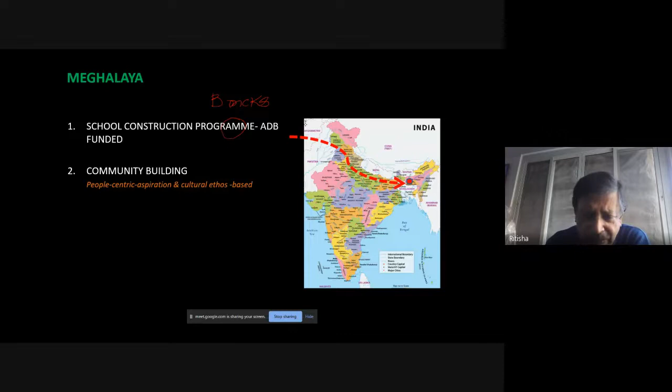So the honorable chief minister encouraged, okay, do you have any idea? I said, why don't we revive bamboo, which your people already know? Then he said, well, there may be some objections from the people because everybody is dreaming of reinforced cement concrete. You know, pan India, if you look at the course of civil engineering and architecture, almost 90 to 95% is reinforced cement concrete and steel, and then pre-stressed concrete, and then cable structure and the like.

But we do not find much coverage in the course curricula on traditional building materials, bamboo in particular. So quite often, the government engineers and generally my own engineering and architects fraternities are not always necessarily very well equipped to deal with bamboo. If I do not understand much about bamboo, how will I convince others about bamboo? So in Meghalaya, I thought it is a good opportunity, with the help of the highest body of the state, why don't we give it a try? So we began the journey.

ADB was supposed to construct 117 school buildings in Meghalaya as demonstration projects, which will be livelihood generating, which will be respecting the local culture, and in particular, it should be climate change friendly. So out of 117 schools, when we did the resource mapping, we found that in the Garo Hills, we were supposed to make 54 buildings, out of which for 9, the community decided, okay, we go for treated bamboo.

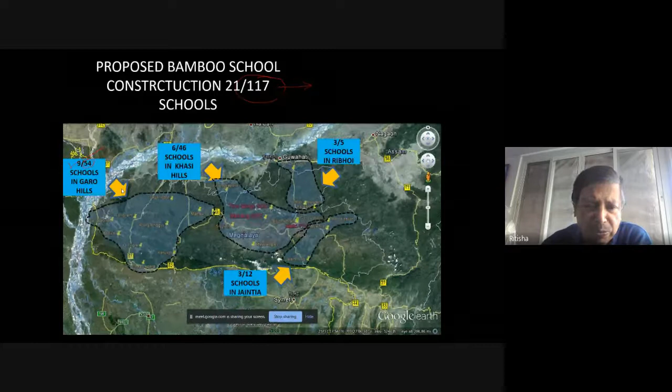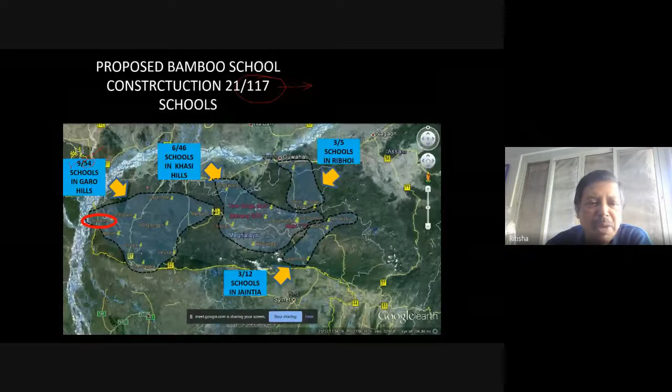In a similar manner, in Khasi Hills, out of 46, 6 school buildings were supposed to be built with bamboo. Likewise, in Jaintia, in Ri-Bhoi. These are the buildings. So total 21 buildings were supposed to be constructed using bamboo. We were all very much enthusiastic about it. And this is Garobadha, one particular block of Meghalaya, where people en masse came forward and said, okay, we will go for a bamboo school building.

Now, I started doing resource mapping, and I got this gentleman who was 84 years old at that particular point of time. And to my surprise, he was in Shillong. To my surprise, he built 30 buildings which were more than 80 years old in Shillong proper, using different varieties of bamboo. But you won't see them because they were all plastered. So this is one sample which he brought for me. And seeing this one, I was so excited.

Then I started traveling to all the schools that he had designed and constructed. And this man didn't have any formal education, but he could read, write, he could do calculations, and he could do the estimations and everything. So we decided that we will make this gentleman as a key man.

Meanwhile, I had already these 4 young boys and girls who were working with me. They were all local architects. And these are the 4 school teachers in Garobadha who said, we would like to help you directly and by getting involved in the whole project. Fantastic.

Did it really happen? It didn't take off as planned. Why? The consultant was pro reinforced cement concrete. That's basically the main problem. Who was this consultant? Because 100 million US dollar was the investment. So we needed a consultant. So the consultant was appointed and they wanted to use RCC. So it was not getting a favor from them.

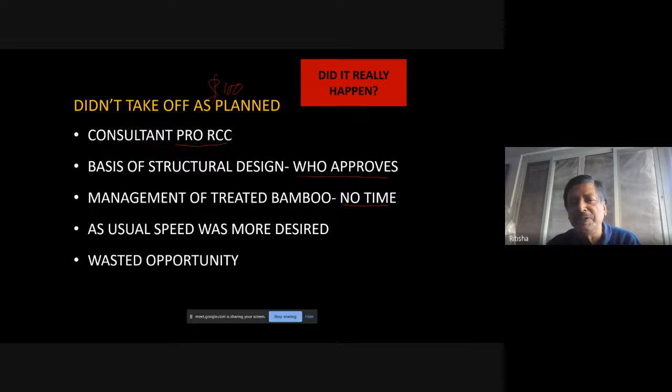So people started saying, sorry, we want more buildings. As usual, speed was more desired. Even Asian Development Bank started saying, come on, man, let me see the school buildings. This was a wasted opportunity. So in spite of such a favorable ground, where the state chief minister was giving us an excellent opportunity, we missed the bus. But Meghalaya still depends on the other states, and they are still importing materials from other states where the state itself is so rich in bamboo.

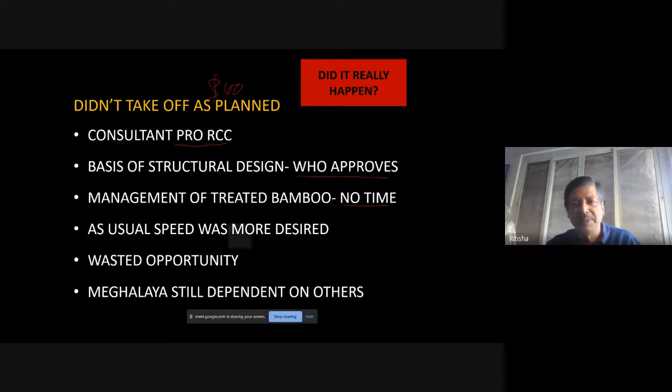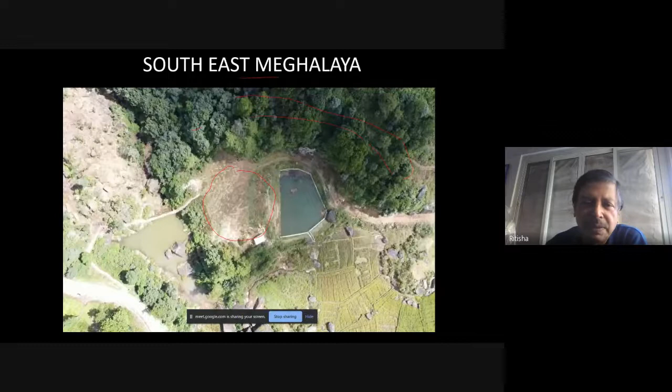But the situation is not all that bad. Currently, I'm working on a project which is in the southeast Meghalaya, and this is basically the site, and this is basically my area. And in this entire forest, there are bamboos tucked in everywhere. Now, in the village, already people have started using bamboo. This is one bamboo building which is 40 years old. And this bamboo, what they do is they do not go for chemical treatment.

There is noise from somewhere. Noise is coming from somewhere. Yeah, thank you very much.

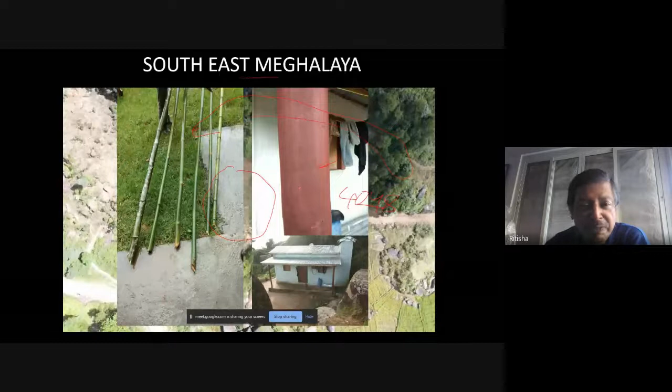Now, the local people, what they use is they simply use red oxide, mix it with a little bit of creosote oil, and simply paint it. And there are many, many buildings within the village which are all built using bamboo. We said, fantastic, we will use this as a base. So we had a community meeting, and in the community meeting, there were a couple of bamboo workers who were invited, and we planned out the entire process. And we all decided that, okay, let's go and build with bamboo.

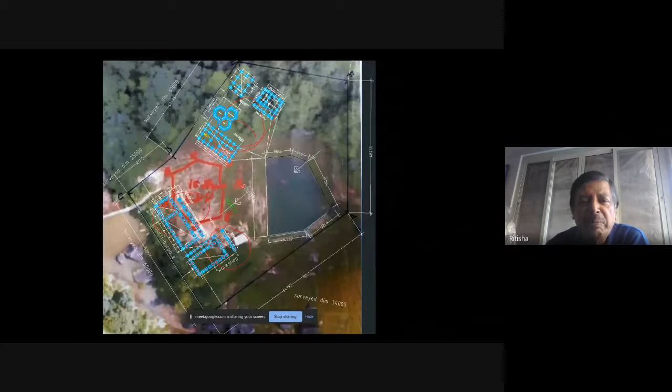Now, this is the site plan where you can see all the building locations. This is basically the training hall, and this is the workshop. These are the different bamboo production units. So the community wants to do a branding, and they wanted to manufacture different building components using bamboo so that they can supply it to different parts of Meghalaya.

So the project right now is at very, very nascent stage. The foundation work had started last week and it's going on. And I'm pretty sure in another 6-7 months' time, we should be able to do something very, very interesting. Here, I would say the villagers, they have the credit of 90% because everything is decided by them, funded by them, etc.

Sikkim. I was the rural housing advisor to the United Nations Development Program. And UNDP was approached by the Sikkim government that under Pradhan Mantri Awas Yojana, why don't you introduce bamboo? So fine, fair enough. So we decided that we will go to the participatory design approach, and following that, we'll be doing a hands-on training program of the masons and the junior engineers, and in the process of beneficiaries' house construction. So that was basically the model, and we thought that this is an excellent opportunity to promote bamboo. So we selected Jorthang, Ghezing, Pelling, and Gangtok.

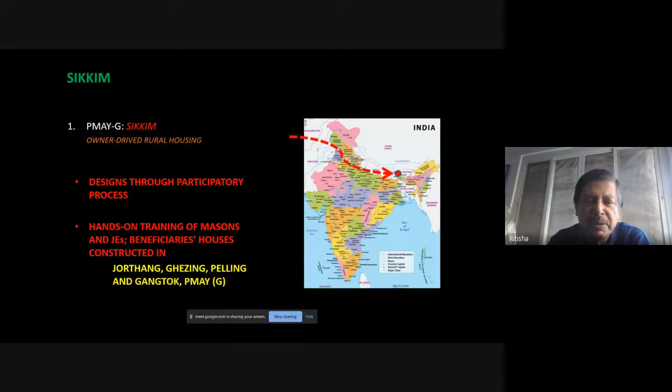These are the few places where, through a hands-on training program, we would like to actually build houses under Pradhan Mantri Awas Yojana, and we'll demonstrate how effective bamboo is. Now, when I did resource mapping in the Jorthang areas, I found that these buildings are all 40 to 50 years old. And this is mud. This is mud. But this is cement on bamboo mat, the ikra.

So, here the basic problem is you see erosion here and erosion there because the plinth height is pretty small, and because of the backsplash of the rain. Backsplash of the rain is the main cause of erosion of this particular thing. You do not find it here because there is a plinth there. So with the people, we had heart-to-heart discussion, and then they showed us various kinds of bamboos which are available there. And they said, okay, we'll go ahead with that.

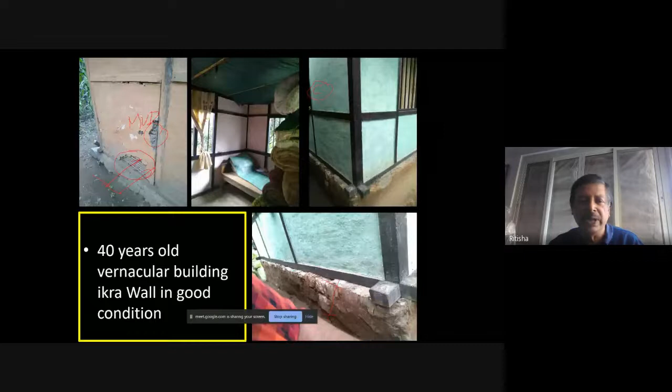This is one of the bamboos that I found in the local areas. So we started making, this is without treatment. I wanted to demonstrate to them how we can make simple trusses. People took a lot of enthusiasm and trusses were built. But eventually they said, no, not in the first house. We don't want to use this kind of bamboo in the first house because it was actually a 5-day training program. So they said, we would like to do a proper treatment of the bamboos and then we will adapt this technology.

So what happened there was we used the timber and timber truss also, but all the wall was with ikra. And what they did was they used a smoke treatment. They take hot water and dip the split bamboo in that for a while, and then they smoke them. They don't smoke the bamboos before splitting. And I found that is one of the excellent techniques where the surface area is exposed to the treatment.

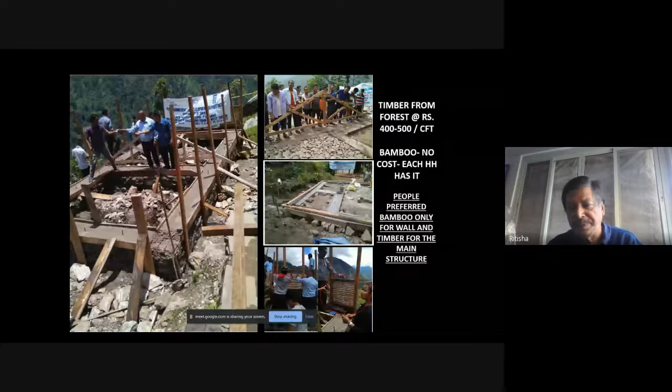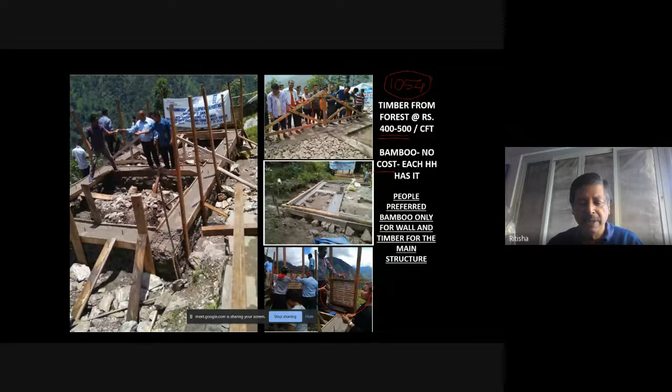Now, I have been told 2 months back that many of them have started using this kind of trusses based on bamboo that we had talked about. Now, the advantage of this is that timber from the forest was 400 to 500 rupees per CFT, and quite understandably, it was all illegally acquired. When the government became very strict about it, obviously they switched over to bamboo. And bamboo had virtually no cost because each household had at least 100 bamboos at their disposal. So after building this, 1054 PMAY-G houses were built, and I have been told that about 15% of them were based on bamboo trusses.

Now, Sikkim has so many varieties of bamboos. These are some of the predominantly used bamboos in building construction, and these are basically the locations. But what was lacking was modulus of elasticity, tension, compression, and shear strengths, bearing strength, etc. Without engineering values of these, it is very difficult to promote in the government situation. And I know CBRI has got ongoing research work on bamboo. I think it's very important that we bring forward these basic strengths of different varieties of bamboos to make them more acceptable to the people. So that's the Sikkim story.

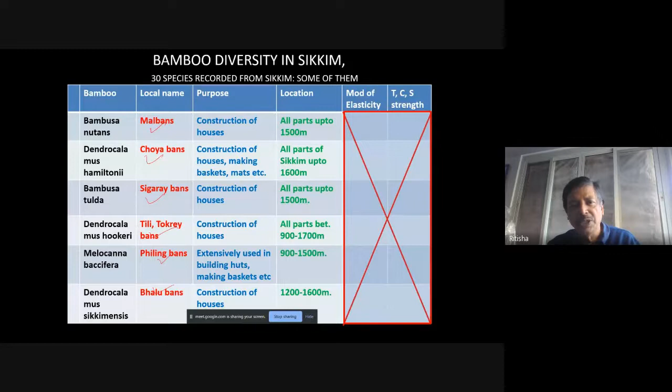Now, at the top level, people were convinced about it. And the engineers had a little bit of inertia right in the beginning. But after their training, they were quite motivated to go for bamboo, though they had a little bit of bias towards reinforced cement concrete technology. They said we need reference to the Bureau of Indian Standards.

If you look at the Bureau of Indian Standards and compare the structural bamboo standard, that is IS 15912, it is nothing compared to, let's say, IS 456. IS 456 is a highly sophisticated code system, and unfortunately, our bamboo codes are very, very rudimentary even today. So we were a bit uncomfortable when they said give reference to the Bureau of Indian Standards. There were just a few pages of it. I think this is a special area where we have to put emphasis.

Management of treated bamboo: when I was conducting the training program, there was no time. But then later on, people had set up their own system. They used primarily copper, chromium, and borax treatment. The community preferred timber plus ikra.

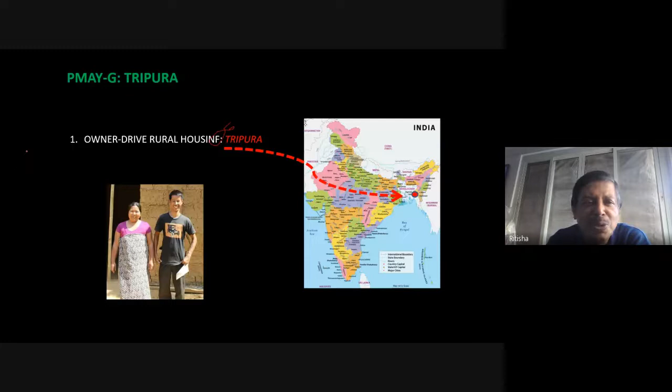After I finished my studies on Tripura, when we made a presentation in the Ministry of Rural Development, MORD, the additional secretary said, I have seen many such research works, but until and unless you field test it, it has got no value to me. So UNDP said that, okay, carry on, go and build some houses. So that is the genesis of this particular Tripura project.

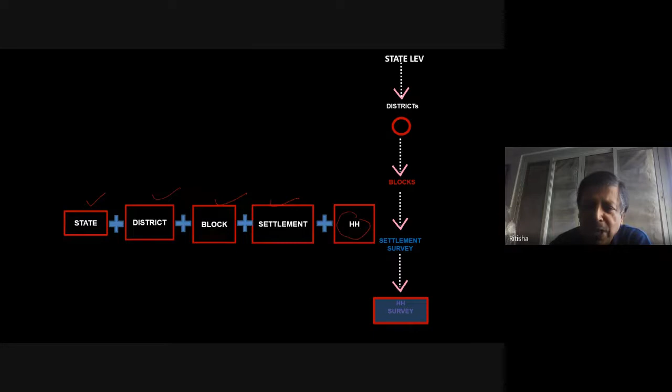We begin with these 5 criteria for understanding the local architecture. We talked to the people at the state level, then district level, block level, settlement level, and finally at the house level. And we traveled by car. We stopped at a place, we stayed there, we interacted with the people, and this is how we tried to understand what is the view of the state level, district level, block, settlement, and the people on the issue of rural housing. Merge them together to get a handbook for design technology and training needs.

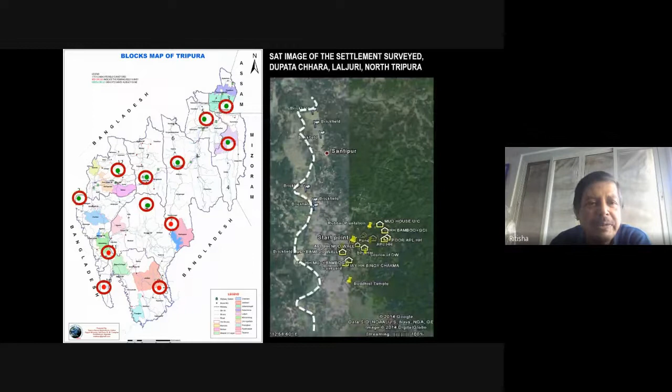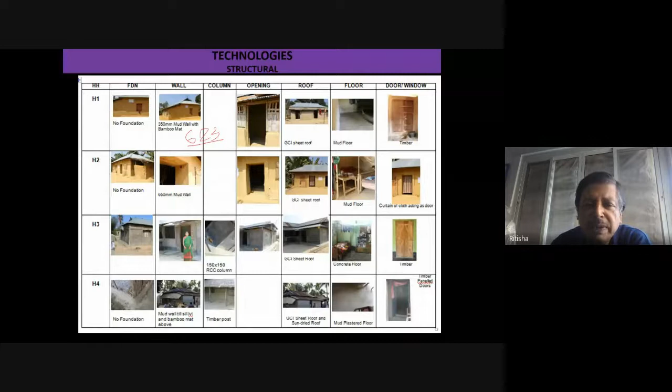Convert it into a compendium and share it with the state and modify it. Because we went back to the people once again, and the people modified the designs once again. These are the places where we did resource mapping in quest of bamboo. We recorded 623, I remember exactly that, 623 minor varieties of different kinds of rural technology that the people used. We didn't want to separate out rural technologies from the space planning. They are integrated with each other.

All the people said, we do not want CGI. In Tripura, they call it GCI, but generally, we call it CGI. The majority of the roofs are in corrugated iron sheet, but they all leak because they corrode after a few years. So people said, we would like to have an alternative to that. And mud was the most predominant construction material for walls. They said, we need some improvement to this one.

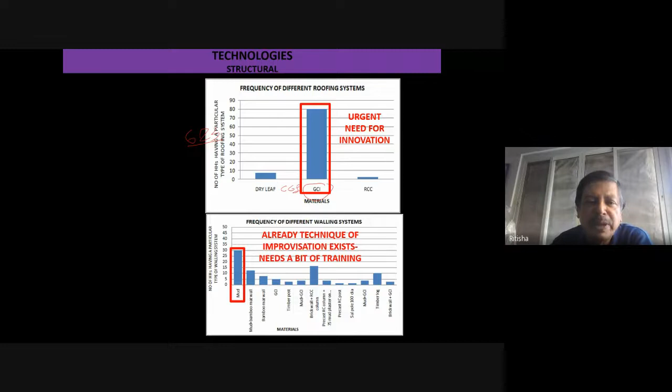Now, this is a typical Tripura house, a tribal house, where they use bamboo on the top as an arrestor because the wind suction can be as high as 175 kg per square meter. And this is how the interior looks. So since there is a connection between the top and the bottom, these people were so clever that if you have two bamboos separated by a third bamboo, the moment of resistance increases many times because there is significant R.

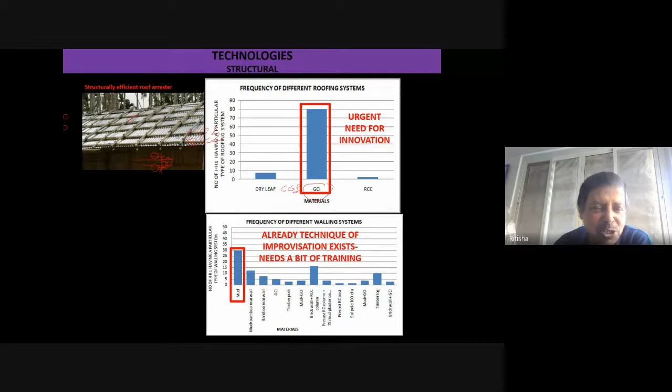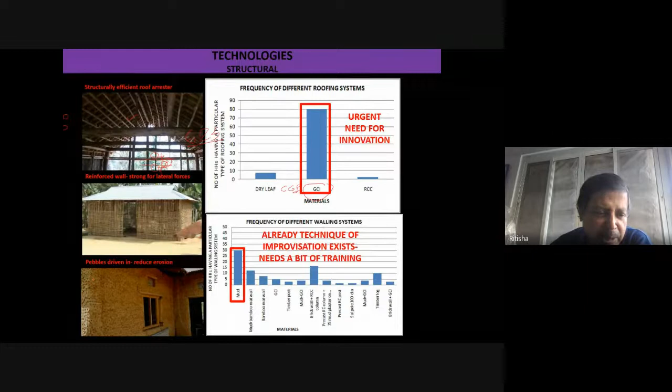So we accepted that. This is another kind of reinforced wall. These are with split bamboos. They are very strong against lateral forces. These are the indigenous knowledges. And when they use mud, they usually hammer in these kind of pebbles to increase the strength, or rather the pebbles are driven to reduce erosion.

So we started learning this kind of indigenous knowledge from the rural people, and then we wanted to utilize the same thing in a revitalized form for the demonstration building that we were supposed to build.

Now, when you typically look at a village, this is after surveying 54 blocks of Tripura, we found that the traditional buildings, that means this kind of buildings, they were 30%. And industrially produced, that is brick and all, they were 10%. And the hybrid, that means between this and this, were 60%. We thought this is the area where we would like to help them because they want to transform.

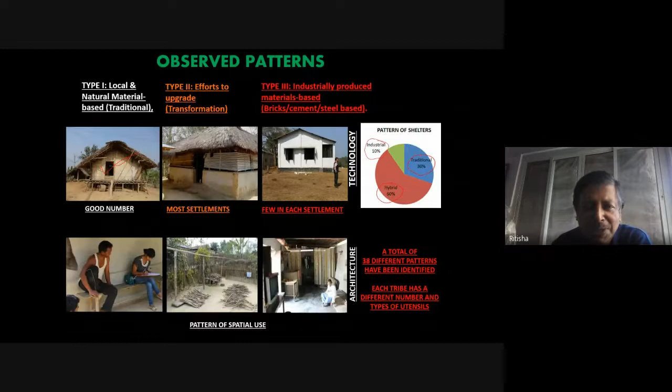And some people like the Keipengs and the Reangs, they said, we do not want to change the building form. So we give them modern technologies. And we also try to understand the pattern of living of the people. So we went house to house. And as I have already told you, 623 places we had visited. And we tried to map the kind of furniture they use.

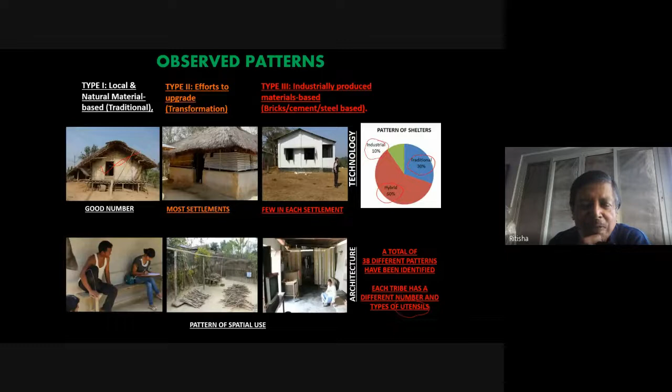Very importantly, utensils is something which is very important in tribal life. Different tribes, they used different utensils. Therefore, we had to design the storage centering around that. The Keipengs and the Reangs said, I do not want your design. Let it be our design only.

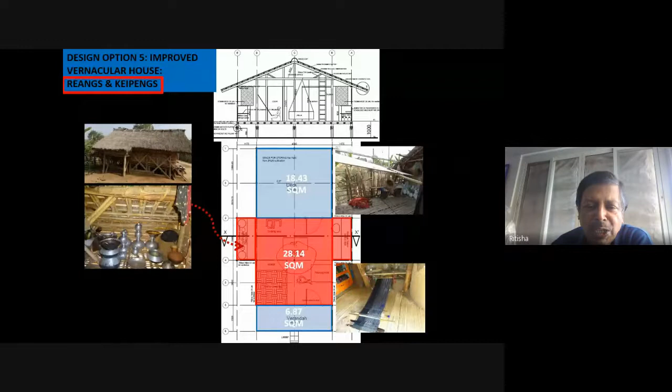So roughly, a typical Keipeng house, this is called a tonghar. Tong means stilted, about 28.14 square meter. And then there is a deck at the back where they keep the agricultural produce at the end of the day. And the front, there is a tiny veranda. And all the activities take place within this particular area. So we didn't want to change the design, but we improved the entire design by adding on the cupboard and obviously treated bamboos.

First of all, obviously, we had to go for training. The training was a very hilarious kind of a situation because in most of the cases, we found that the traditional workers, they were as knowledgeable as the resource persons. And there we used copper, chromium, and borax treatment, and it was a 5-day training program.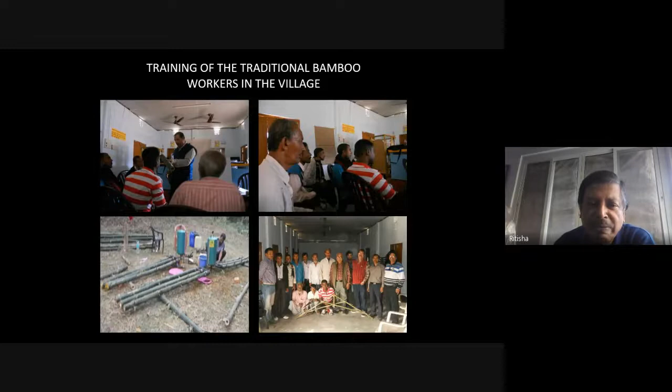Once the training was done, we took them to a place which is called Katlamara, which is a good 45 kilometers from the state capital, Agartala. And there was a good furniture manufacturing unit. So we thought that the joint should be artistic. So those people, they taught the masons and me also how to do artistic joint details.

Once everything was done, we thought, let us procure the right kind of bamboos. This was really very difficult. We had excellent quality Kanak kaich bamboo. Kanak means gold. Kanak kaich bamboo is roughly about 50 millimeters diameter, and it's almost solid like lathi bamboo. In the center, there will be hardly 1 inch of void. This was excellent quality, but quite expensive.

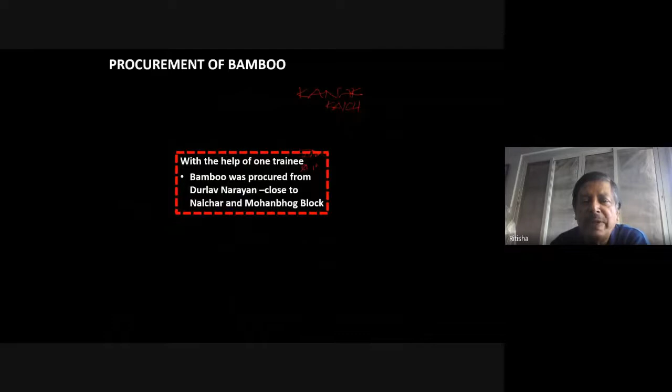Then we went to another place called Langmanu Pahar. There it was quite affordable, but it was far away from the place where we were building, so it was not cost effective. Finally, with the help of one of our trainees, we were able to find bamboos nearby. Treatment started. We started building.

Then came this lady. This lady came and said, "Stop all this nonsense. Bamboo is bad. We have been using bamboo for the last so many hundred years. Do you live in a bamboo house in Delhi?" she asked me. I said, "No." "Then why are you trying to use bamboo here?" So I said, "Look, ma'am." Then I started explaining many things.

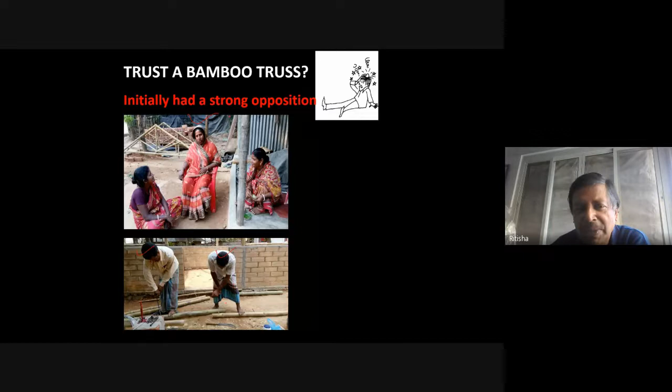And I told my construction workers, this is Omar Ali and this is Sultan Mia, I said, "Go ahead. Don't stop." So they were using these hand augers. And the lady sat there for about an hour and a half. And when she saw that it was so hard to drive it through these bamboos, and when they used an electric drill, smoke was coming out of it, then suddenly the lady got up and said, "Okay, good enough, carry on." So after we got her go-ahead, we started building. A very simple house was constructed.

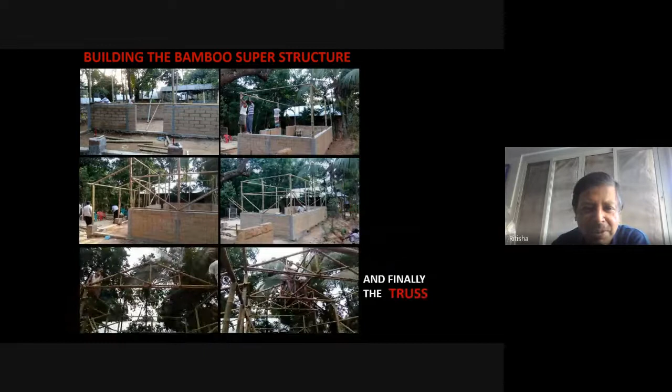And for your information, I'm talking about June 2016. We spent 16,536.89 rupees with a profit of 20%. And this is basically the audit of different bamboos that we had used. And we covered 409 point whatever square feet. So that's basically the bamboo.

I was personally present there documenting the data every day. And the government engineer also came forward and he gave me a hand. In the beginning, the government engineer was totally against me, totally against bamboo. But then in the end of the game, when the whole thing was over, he became the champion of that particular project.

Then what happened next in Tripura? Is Tripura flooded with bamboo houses? No. When we were having resource mapping, there was hardly any enthusiasm. And when we were building the 4 buildings in Sepahijola district, the enthusiasm went up and up and up. And it was very high in the end of 2018.

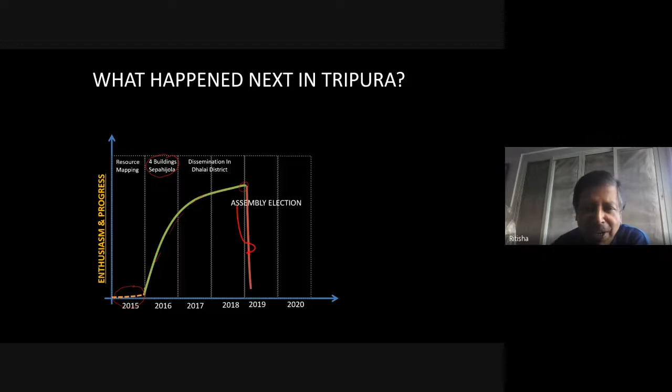Then came the election. When the assembly election came, that was basically the time when the principal secretary shifted to Delhi, the joint secretary, Rural Development Department, who was a protagonist, got promoted. The champion BDOs and the JAs got transferred, and UNDP withdrew the project. Sone pa suhaga. The whole thing flopped. And then it is going on slowly, slowly.

So one of the major things that I have understood is that until and unless there is top level support promoting bamboo, and there is basically a whole team starting from the top level down to the grassroots, it is very difficult to promote bamboo. But whatever I might say about Tripura, currently I have been told that they are again picking up.

They're again picking up. So in Tripura, what happened was, the top level, they were apprehensive. They were cautious because they were not aware of the alternative technologies. Okay. And even today, I can't say that the top level is really, really convinced, but now they can see some examples.

Engineers, after initial apprehension, the chief engineer, rural development department, he accepted the analysis of rates. This is for pan India. If somebody says where is the analysis of rates of bamboo, I would request you to directly interact with the rural development department, and there is an officially submitted analysis of rates of bamboo and cement stabilized earth block.

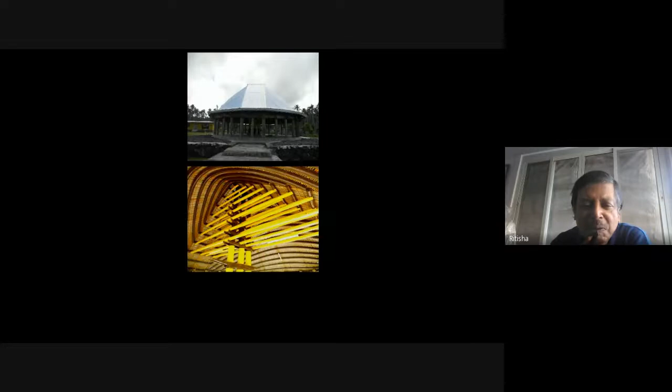Now, local vernacular architecture was far from there. This is a sisal-like timber. These are tree branches, straight tree branches, and they are used to make this kind of hall of audience. So what I did was start studying with the local people.

Look at this joint detailing. These are the fibers from this sisal-like timber. They are all dipped in Pacific water for 3 months, and after that, from the bark, they derive all these fiber-like things, which are very strong. Because don't forget, this is in the heart of the Pacific, and high wind is quite natural, 180 to 200 kilometers per hour.

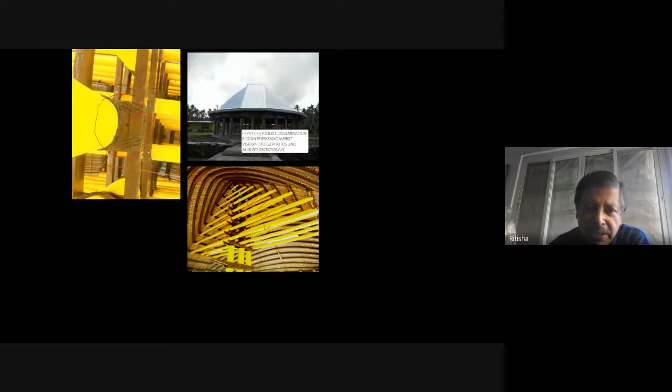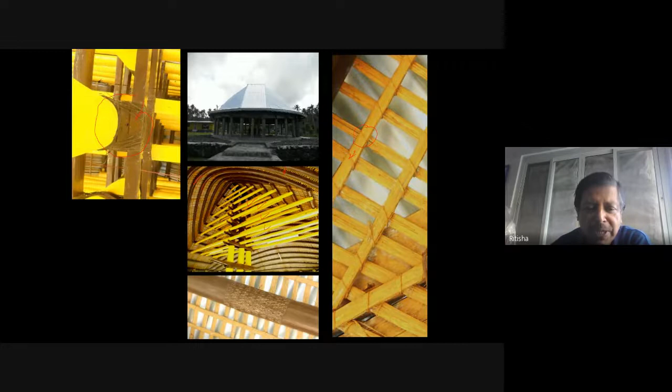Because of that, Samoans always use a round form and a round roof, round form in plan and round roof in section, to bounce off the air very easily. Look at the artistic way of joining the rafters and the main members. Again, this is the same fiber extracted from sisal-like timber. Now, they do not want to waste anything. So they have this kind of joining, which I had used for joining bamboos, and the efficiency of the joint is quite good.

Now, in summary, after studying Upolu and Savai'i, the joints tied with strong wood fiber are replaced after 5 to 10 years. It is part of Samoan life. They don't give away in one day. You get one after maybe 5 years, one maybe after 6 years. But every joint is visible, so whenever there is any distress, they simply untie the old one and retie with a new one.

And don't forget, there is quite a good movement when there is high wind, and these fibers are strong enough to take care of this. These joints are a rare combination of art and engineering. And that is something we decided we will put in the code, the National Building Code.

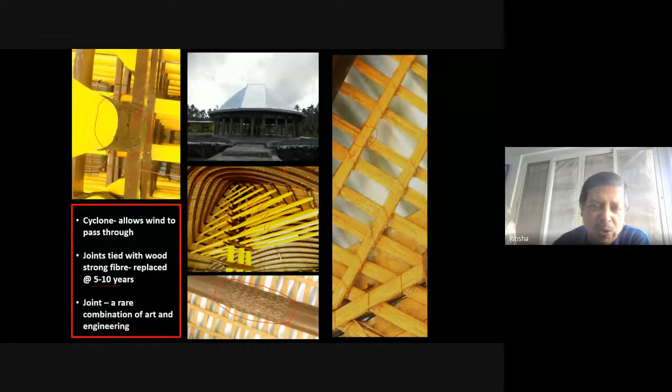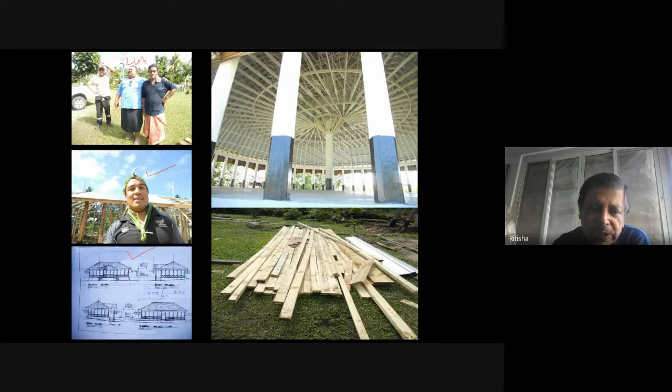Now, the Samoans very clearly said, we do not want to use bamboo right now; bamboo will be at stage number 2. So, from American Samoa, we brought a machine. I was there for about 6 months. We brought a machine and converted the local bamboos into these kinds of extruded bamboo timbers. These are all bamboo timbers, a good replacement for the timber imported from Australia.

And this is a photograph done by this gentleman. He is a Fiji Indian. There are lots of Indians in Samoa. Both of them made a huge shelter like this using this kind of extruded timber. Now, this is in the Bureau of Standards of Samoa. Bambusa vulgaris was used for this particular kind. Most of the bamboos I can't really pronounce because they have such long names. So that's Samoa.

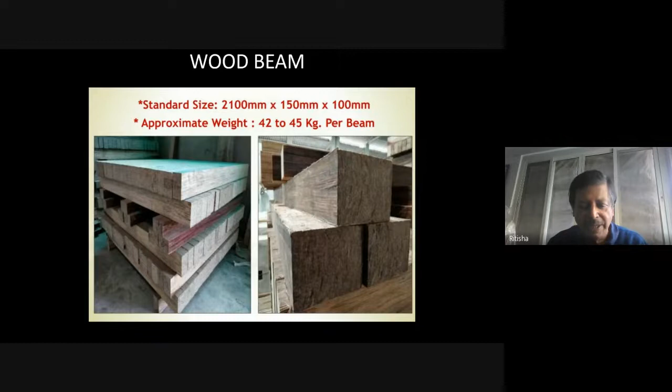And interestingly, we didn't have any test data. So I had to bank on the Indian codes, and from the Indian codes I got the technical details of the bamboo wood. And I told them, till you get things tested, why don't you accept it? So on an interim basis, they accepted all these things. And by this time, they have already done their own test result-based tables.

So in Samoa, I would like to say that the vernacular architecture is included. Bamboo is very much part of it. They already had plenty of bamboos in Samoa, but we had identified 3 varieties, and they are being promoted as the main units. It's now being promoted, people already know about it.

A very quick journey into South Africa. In South Africa, my main terms of reference was to make some cost-effective schools. The schools should be child-friendly and cost-effective. And there was a large level of unemployment among the school dropouts. And the government requested, can we have technology where we can utilize the dropouts from the school so that the crime rate gets reduced.

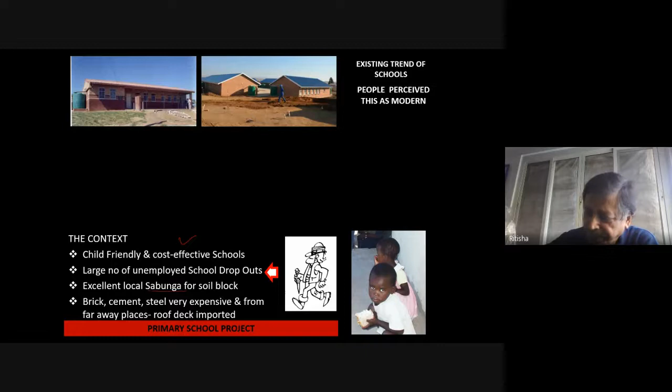And the local village had excellent soil for block making. So we thought we will be using local materials as much as possible. But the local people, in the Eastern Cape, the South Africans, they were with Xhosa background. They were all Xhosas. Now, these are the buildings which are in Western pattern. And most of these materials were imported, either from Europe or from Australia.

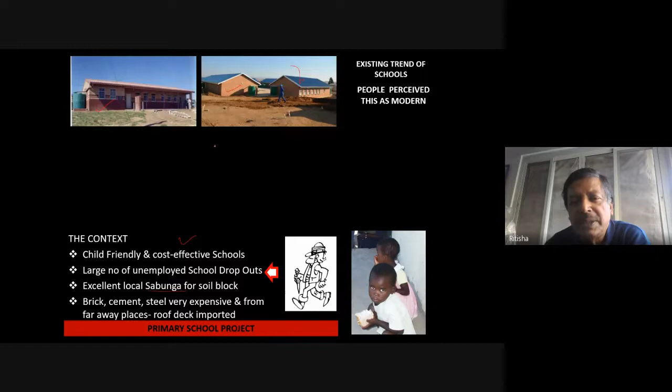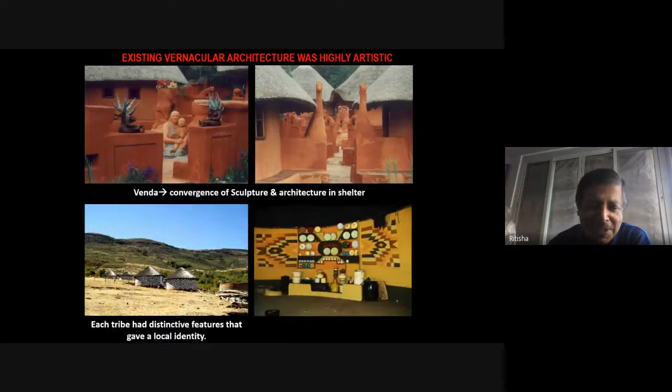Now, every South African dreamt of a house like this, whereas they had excellent rondavels in the vicinity. So initially, people thought this is running back in time. But with a lot of dialogue, with a lot of talking with them, I said, okay, fine, you don't have to do anything. You have got your own architecture, excellent architecture. Every tribe had their own pattern. Just by seeing the pattern, you could recognize the tribes.

And they use this kind of conical shapes because all these areas are in tornado area. So they had an excellent piece of architecture. I said, why do you try to follow the Western world? Let us stick to what we already have. This is a fabulous thing which was built after a long dialogue with the local people. And this is cement stabilized mud block wall.

Now, these kind of roofs, these are typical Xhosa roofs. And all I had done is a little bit of modification to increase the strength against the wind suction. That is the only thing that I wanted to do with that. For the rest, they used a smoke treatment plus put a coal tar and a local grease, and that's it. A very neat roofing system.

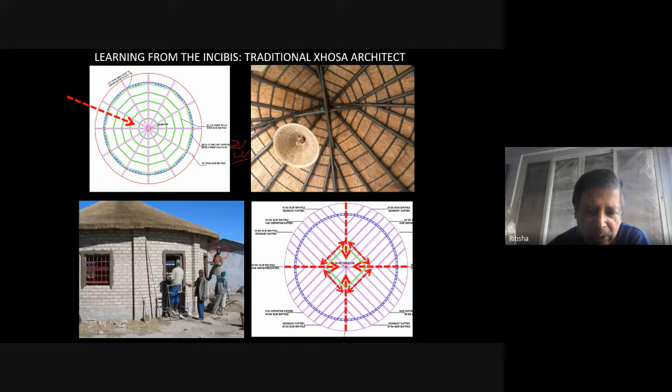And this guy, he is a main bamboo worker, and he's also a thatcher. So see the excellent work that he had done. Entire process. All these are school dropouts. And in the process, we had created 90 days of work for the local youth. And some of them were Umakis. Umakis were the builders, and Incibis were the architects. So they adapted cement stabilized mud block. And here we were instrumental in reviving the traditional architecture.

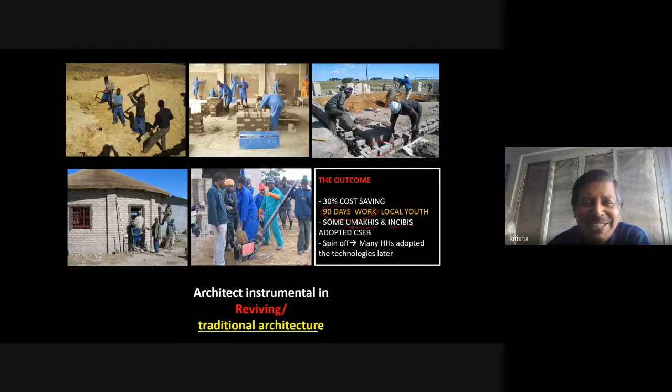We let them learn. This is a rat-trap bonded wall, which I had introduced there. They called it Afro-Indian bond. They first said Afro bond, I said, no way, this is from India. If at all you want to do something, it should be Laurie Baker. And they said, no, let's have it Afro-Indian. So I didn't resist much to that.

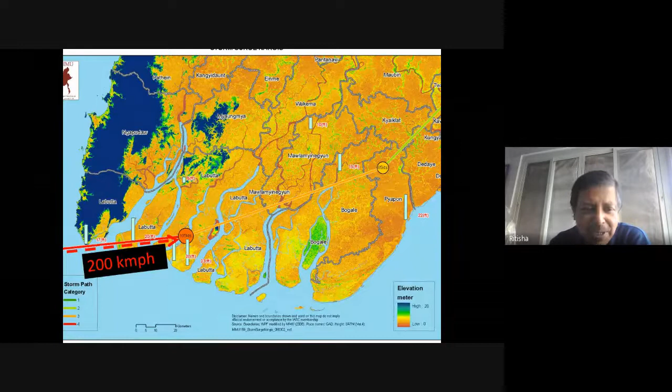Very quickly, Myanmar. In Myanmar, I think it was 2008, there was a super cyclone called Nargis. It came with 200 kmph, then reduced to 156 kmph, and then it tapered off. My role there was because the government of Myanmar wanted the UNDP to help them design the cyclone shelters in the coastal areas of Myanmar. But UNDP told me additionally that for the cyclone shelter, we cannot use bamboo because state PWD will never approve that. But for housing, why don't you give it a try?

Fair enough. I arrived there and went to a couple of villages. By the way, there was a tidal wave, not really a massive tsunami, which was brought forth by the super cyclone. So every village I visited, I found that one or two buildings survived. I said, how is it possible that the tidal wave spared a couple of houses, not the others? Then the villagers told me, wherever there is a pond in front of the house, it got saved.

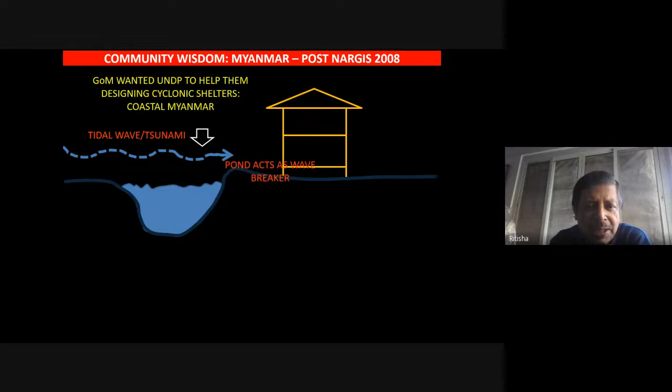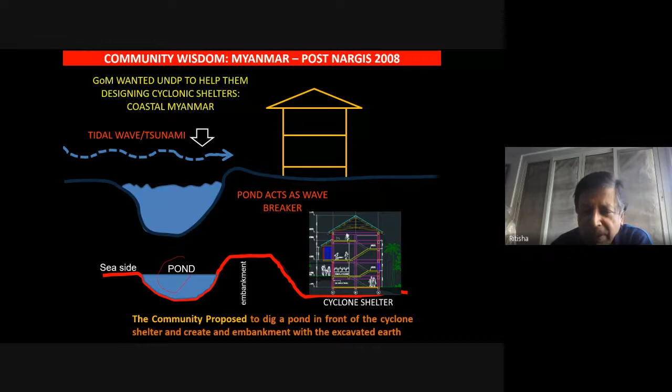Why? What they reported is that when the tidal wave strikes a building, we know what is the result of that. If there is a pond in front of it, then the tidal wave actually falls into the ditch, rises up, loses energy. Therefore, the buildings are not much affected. We simply took this. And with the help of the community, we dug up and created a pond in front, because pisciculture is very common, made an embankment, and this is how the cyclone shelter was built, purely based on whatever was the existing knowledge.

In the workshop, they had identified 320 square feet as a minimum covered area with one bedroom for men, one for women, cooking space, toilet, bath, and veranda. And so there was a workshop. Each individual house had designed their own house sitting there.

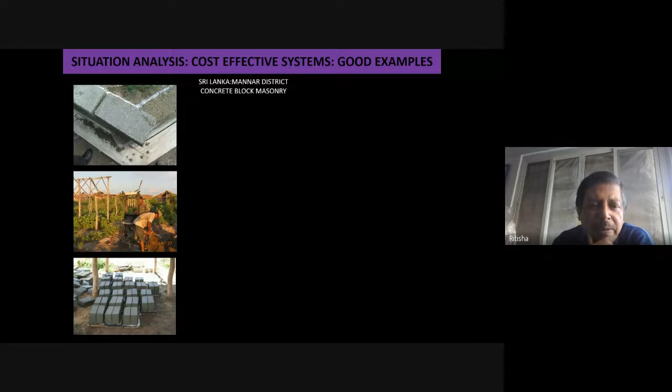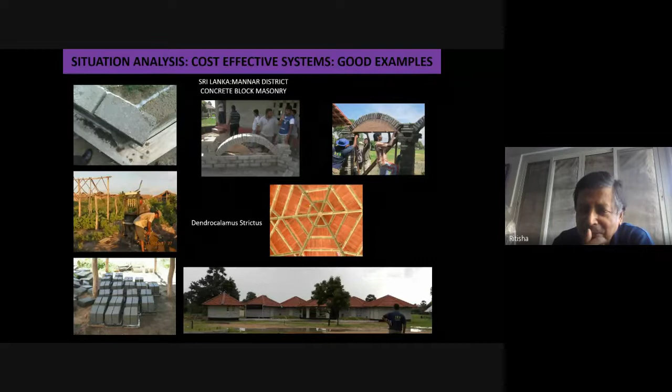We produced these kind of blocks where stone chips were available from the nearby mountains. And this is basically the typical look of it. And this is the ceiling. And you can see, of all the bamboo works which I have done, I still like it. And this is the 10th year running. And I got some of the recent reports that they are going pretty well.

But I never say going pretty well until and unless I go personally. My problem is whenever I go and see my own projects, I start identifying mistakes. I made a mistake here, I made a mistake there. But compilation of this knowledge makes me slightly better for the future projects.

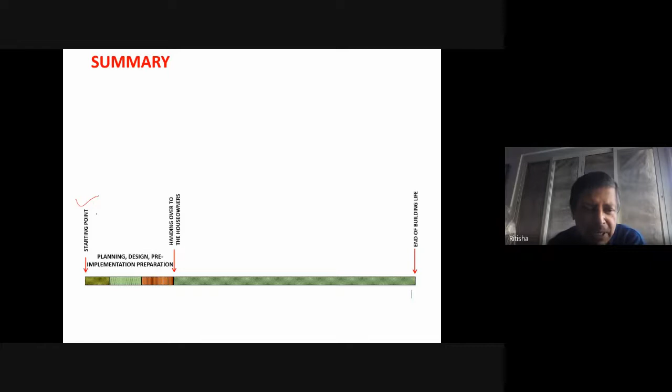So in summary, I would like to say that every project has got a starting point. And after the starting, we do planning, designing, and pre-implementation preparation. And this pre-implementation preparation is the most critical of all the things. And then we build the house, which is supposed to last for 30 to 50 years.

Let us take it for granted that a single bamboo may not be able to survive for 30 to 50 years. We have to design the entire house for replacement of bamboos. As and when there is some distress appearing in a particular member, let us replace it. Until and unless we go for a design system like that, it is not possible to make a building last for 30 to 50 years.

So I have noticed that when we build, there is a huge increase in enthusiasm. And after the building is over, the enthusiasm goes for a little bit and then it dips down virtually to nothing. One of the main reasons is constant presence in a community is a must. If you're serious about promoting bamboo in rural housing, constant presence in the community is something that is very, very important.

If you buy a product today from the market, before you buy, you ask, what are the services, facilities? What is the post-sales technical support that you would like to give? You buy a car, you think about the maintenance of that. So until and unless there is a constant presence in the community, in the field of rural housing, it's very difficult to keep up the pace.

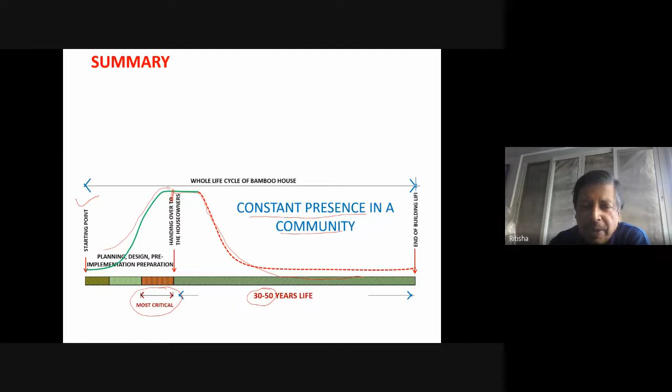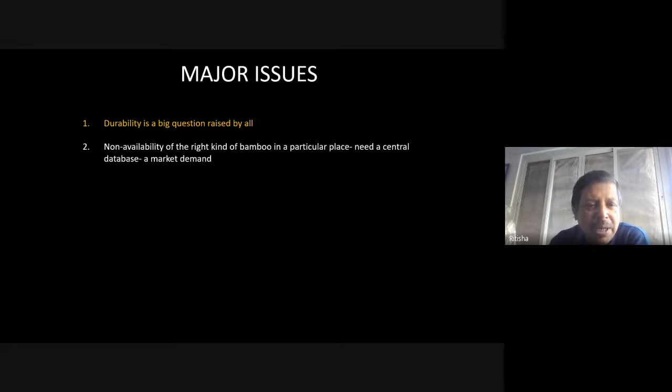Major issues: durability is the biggest question. And still, I'm not very comfortable about this. Second is non-availability of the right kind of bamboos. That is something because we need a central database, which is basically the market demand. The engineering fraternity asks for strength data.

Bureau of Indian Standards need upgrading. I would recommend that you please read Ermias Amedis's recent paper, which was published in October 2021. He gives a comprehensive, comparative analysis of different codes on bamboo and what the shortfalls are. As far as the Indian code is concerned, he says that it should cover limit state design, structural performance and joint design. I fully agree with him.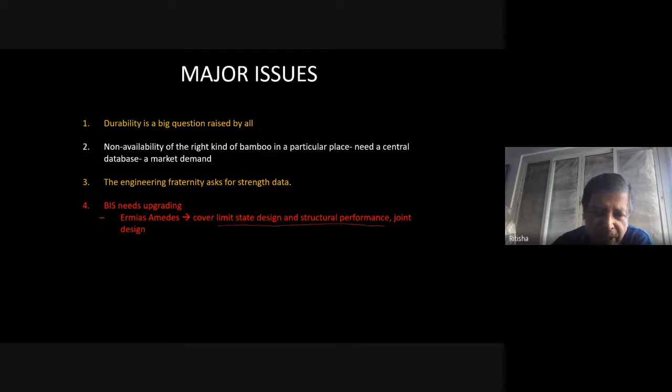Now, very importantly, if you look at this, can you see the video? Can you see the video? Hello? Not moving. Yes, sir. Just a minute. We see the video. Can you see the video? Yes. Yes, sir. Louder.

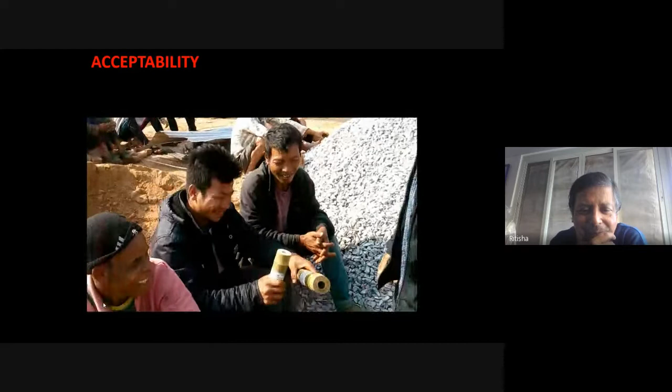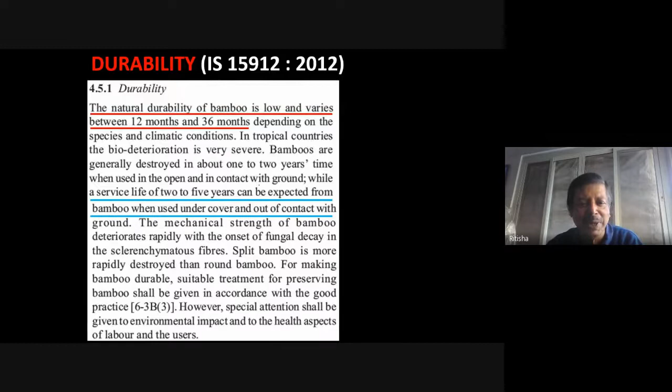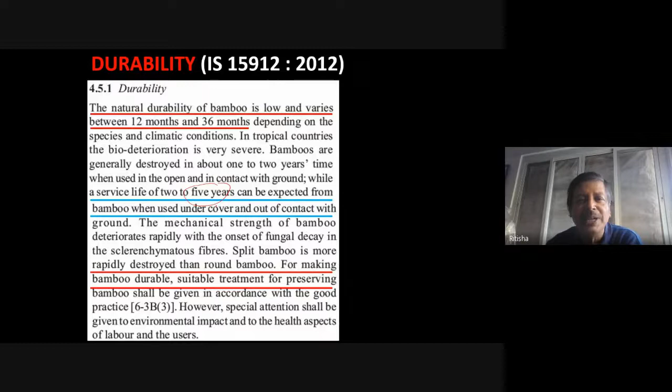Now, as far as durability is concerned, the code is saying 12 months to 36 months, which is a bit discouraging. Many engineers in the government scenario would say, hey, the code is saying that, how do we trust it? But bamboo, when used under cover and out of contact with the ground, performs much better. The code is saying 5 years. And these are all without treatment. If you do the treatment, what will be the durability? CBRI can do accelerated laboratory testing to give some favorable results.

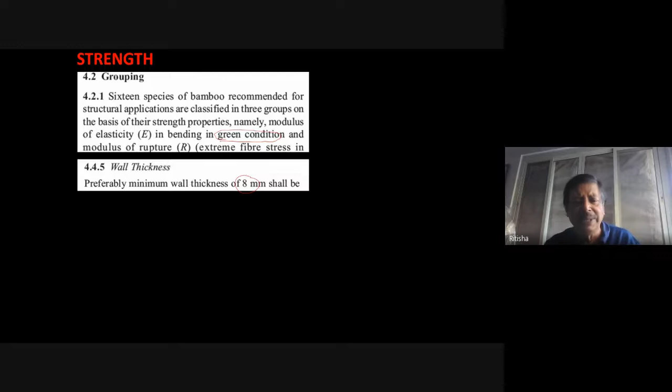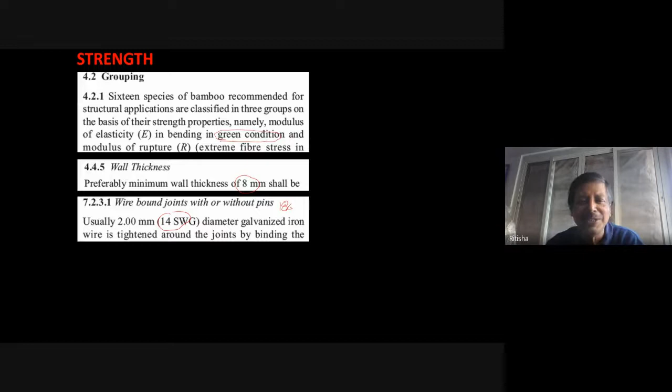Now, very interestingly, 16 species of bamboo have been recommended by the Bureau of Indian Standards, based on the modulus of elasticity in bending. And these are all tests in green condition. We have to have more reliable data on treated bamboo. Wall thickness 8 millimeters. These are basically the guidelines which we have to compile together. The code prescribes 14 gauge wire, but in my personal experience my masons will never work with this. They go for 18 gauge because unless you use 18 gauge, you cannot pull it and tighten the joint. So the code has to reconsider all these points.

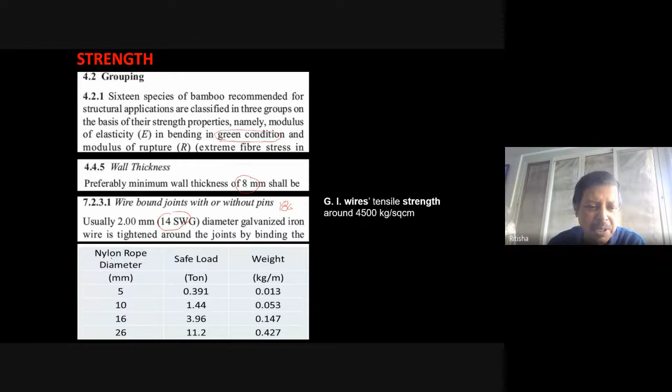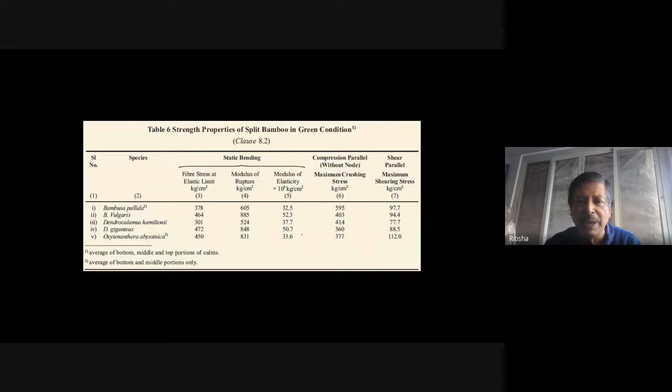And nylon rope is a good alternative because corrosion of the wire is very important. There are lots of charts available showing, if you're using nylon ropes, what diameter and what strength is available. GI has 4,500 kg per square centimeter tensile strength, but it's subject to corrosion. So we have to go for an alternative to that. Different properties are already available, but they have to be compiled properly. Split bamboo, green condition, we need similar test results for treated bamboos.

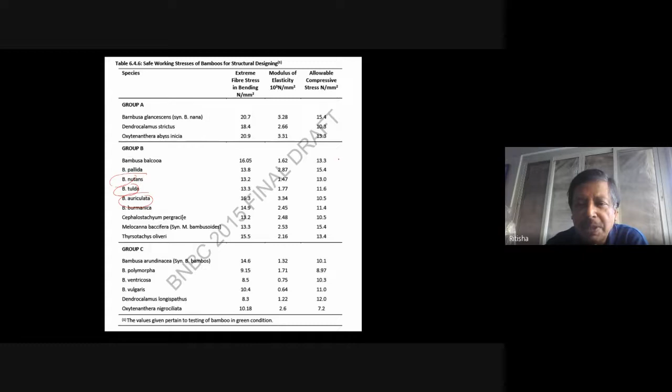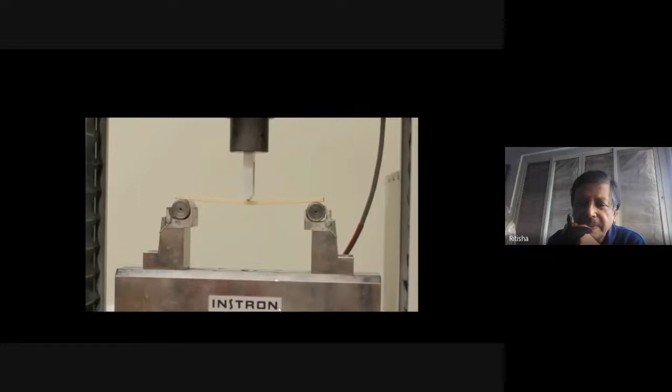So this is one of the samples of bamboo that we test, and you can see it's a fairly thin sample. So one of the things we do is, if this is the whole wall of the culm, we take specimens from different radial positions, and then we do bending tests on these beams. So we set it up like this, and we do a little bending test like this, and that gives us a measure of the stiffness of the bamboo and also the bending strength of the bamboo. We also do compression tests as well.

So, what I wanted to say is that CBRI should be coming up with this kind of test results of bamboos across the depth of the cross section. So then we'll be having more reliable data. We need some special notes, institutional, particularly directed at CBRI. Need for a single source of engineering properties, the National Institute with state counterparts, academic institutes. Wherever I go to do the testing at the state level, the academic institutes' process is so very complicated to get any testing done. So they have to ease out the process. And number two, they have to install equipment for different types of testing of bamboos.

Creating a database. Every place we build with bamboo, carry out tests to know the modulus of elasticity, and direct and bending shear, etc., and feed them back into the central database. So every year we should be able to acquire more meaningful data to pave the way for, or rather a royal way for, bamboo in different areas of construction.

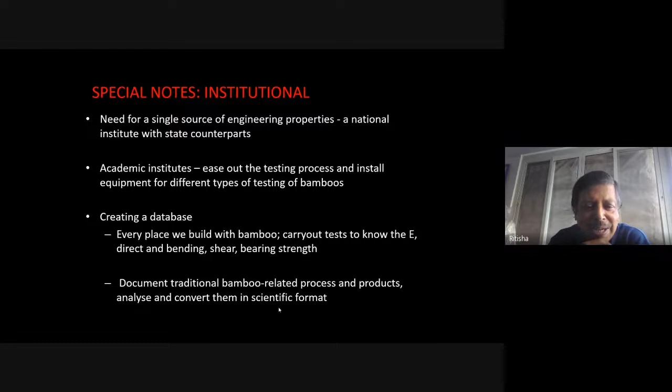Document the traditional bamboo related process. There is a golden opportunity for us, because it's almost dying, to catch them, document them, revitalize them, and convert them into scientific format. Some of the technical notes: success is in detailing. Even now, detailing is a big question.

Know the allowable stresses, which I've already talked about, durability, safe disposal of bamboo, which I don't think we are thinking about. If you treat with any chemical, let's say copper, chromium, and borax, when the building life is over, if people take the waste bamboos and start burning them, that will be a very uncomfortable situation. So safe disposal of bamboo when the building life is over is very important. Supposing out of 30 million rural housing under PMAYG, 3 million are using bamboo, then at the end of the lifespan, let's say 50 years or 30 years, so much bamboo will be there in society, which we have to safely dispose of. This is one area which I keep flogging everywhere.

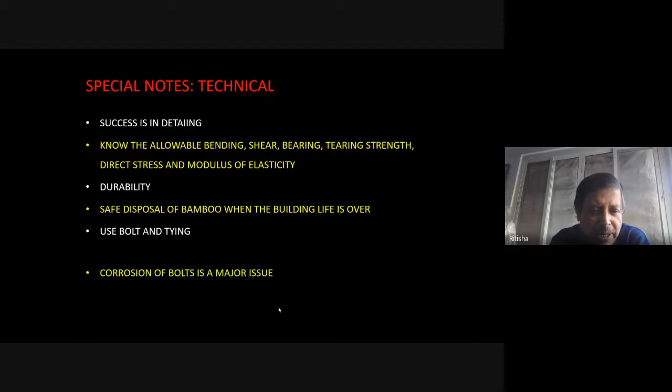Use of bolt and tying. Only bolting will not do, tying will not do. Corrosion of bolts is a major issue. Nylon bolts may be quite good because they are recyclable. Also, I have come almost to the end of it. Protect the bamboo from direct exposure to sun and rain. That's principle number one. Keep the bamboos visible for easy detection of distress.

This I have noticed in Myanmar. This I have noticed among the tribal people of Northeast India. I have particularly seen in all the vernacular architecture of Fiji, Samoa, that every joint of bamboo is not only easy for visual detection, but the joints are done in such a manner that you can repair them very easily. Raise bamboo from the ground. That will be a disaster. Keep provision for adequate ventilation.

That's it. To be successful, you have to have a good understanding of bamboo engineering. The more you understand bamboo engineering, you will be able to produce aesthetically pleasing buildings. With that, I would say that now the situation is slightly better and we have got some success, but there is a long way to go.